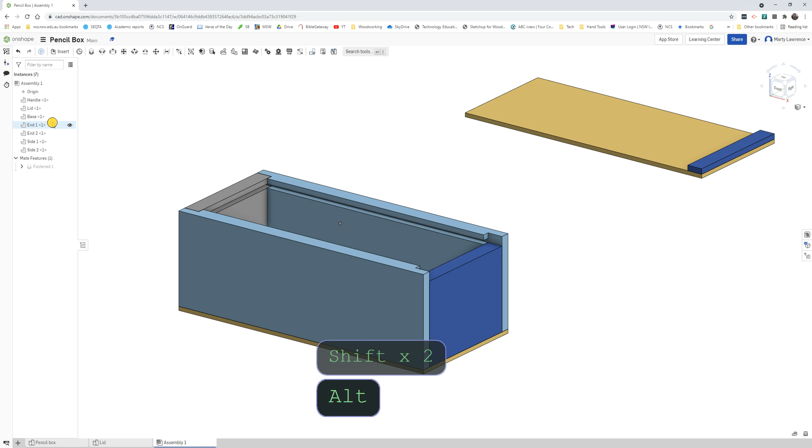Over here in our browser, we've got all our parts listed. We need to fix some of these in place. The handle and lid we're going to make slide in and out, so we're not going to fix those since they have to be able to slide. But we're going to fix the base.

Right click and go find fix, and it gets this icon next to it showing the part is fixed. Basically all the parts that make up the box we need to fix in place. So base, the two ends and the two sides are all fixed. The handle and lid shouldn't have that icon next to them. If you accidentally put it there, right click and do unfix.

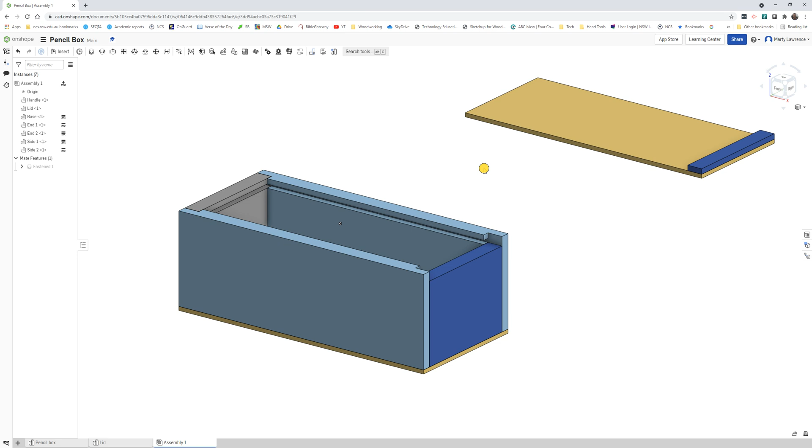This uses a different type of mate. It uses what's called a slider mate.

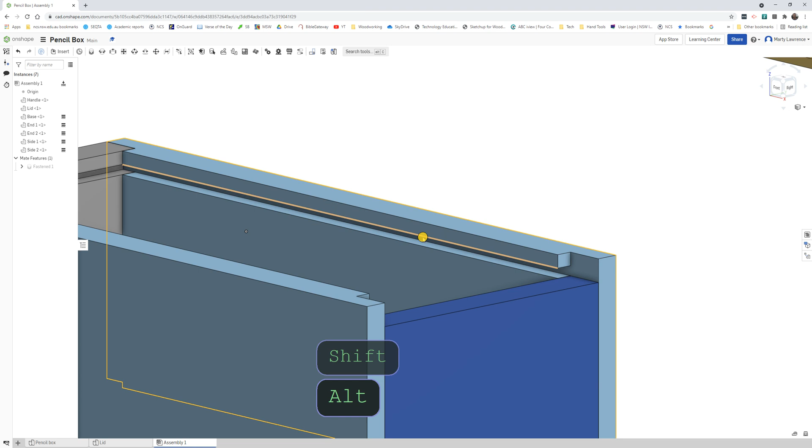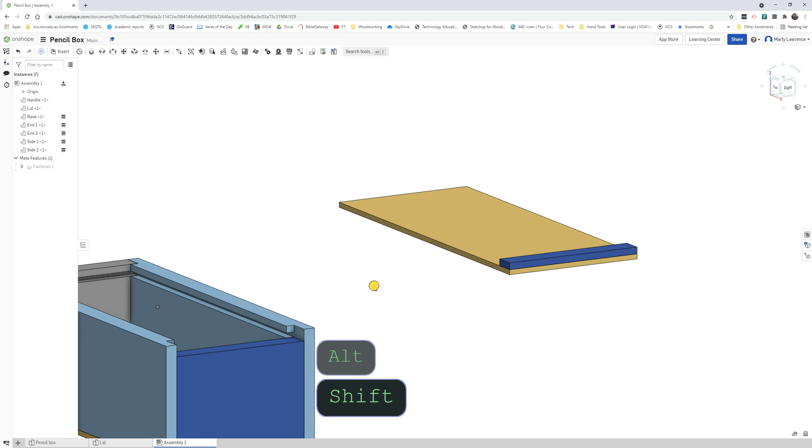Now we have to visualize and understand in your head how this lid slides in here. If you can imagine, I'm going to zoom right in here, look inside that groove, and we've got this edge in here - I'm hovering over it right now, hopefully you can see it. The inside bottom edge and the bottom edge here will be touching against that. So it's important that they'll be touching each other, and that's how it will slide.

So we're going to look in the toolbars for a thing called a slider mate. Firstly, we're going to zoom in so we can see that little edge inside that groove. Again, we need to make sure that icon is standing up, not laying flat, and it looks like it's kind of encircling the edge. Once the icon looks like it's in the right place, click.

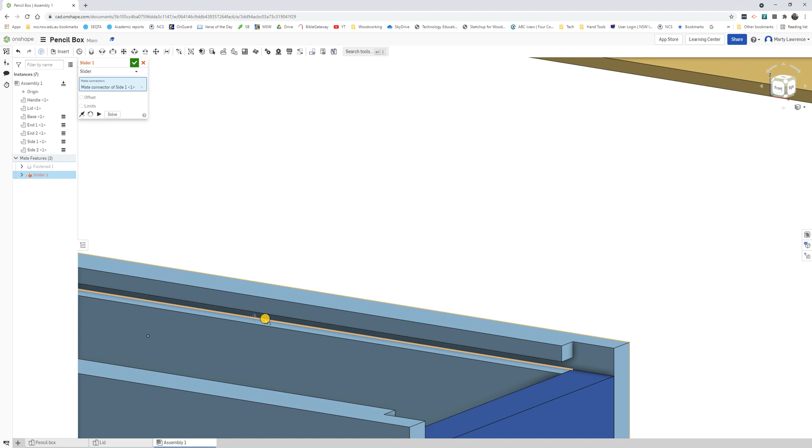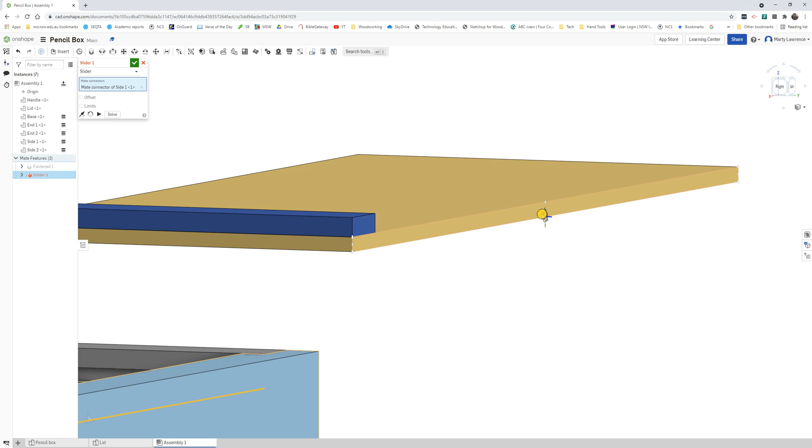Now we're going to zoom backwards, and I'm going to orbit around so I can see this edge of the lid, and the same thing here - make sure that little icon looks like it's encircling that edge. It shouldn't be sitting flat or anything. Don't click anything until it's sitting in the right place. Try moving your cursor in different places until it looks right, and click. Now don't be too concerned that it's left that thing in the air - that will put itself in place shortly.

I'm not going to try and explain why or how, but this works. Actually, I'm jumping ahead of myself. If you need to, you could try flipping and revolving, but it must look like it's sitting in place.

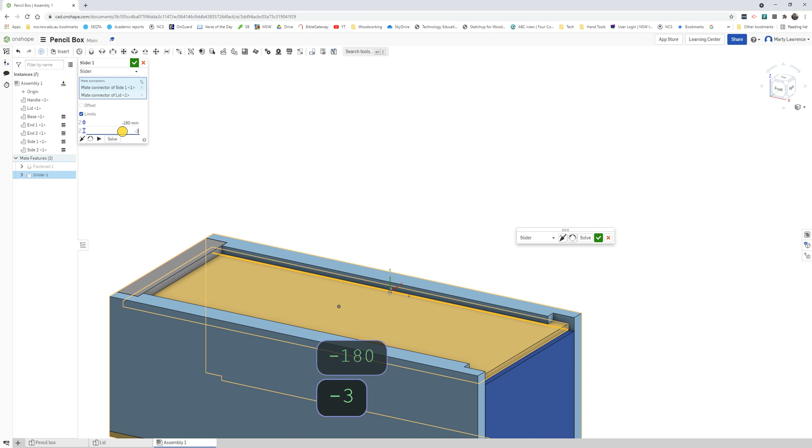Now we're not going to tick yet. We're going to go over here to this dialog and click the limits button. I'm not going to explain how, but these numbers work. In here where it's got no minimum, type in -180, and below it type in negative 3. Press enter. Now it should look like it's moved the lid in place.

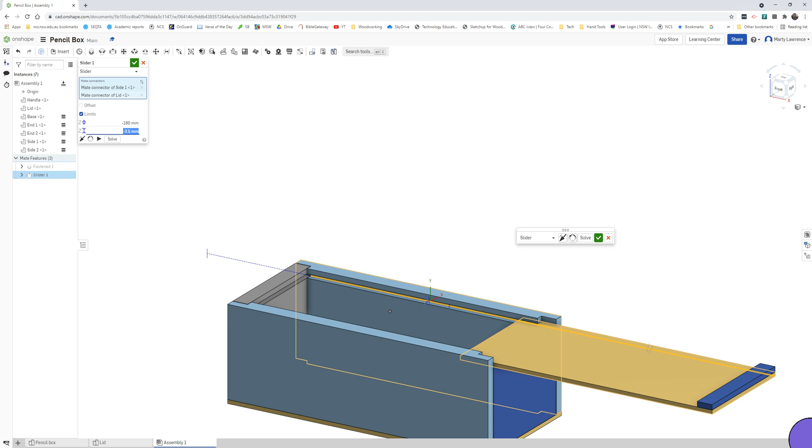One thing you can try is dragging. If we got those numbers correctly, it should drag and stop, drag out and stop, and not go any further. Notice that it's put the handle back in place now. If it didn't put the handle in place, try clicking solve, and it should do. There's a little play button here which can animate that movement.

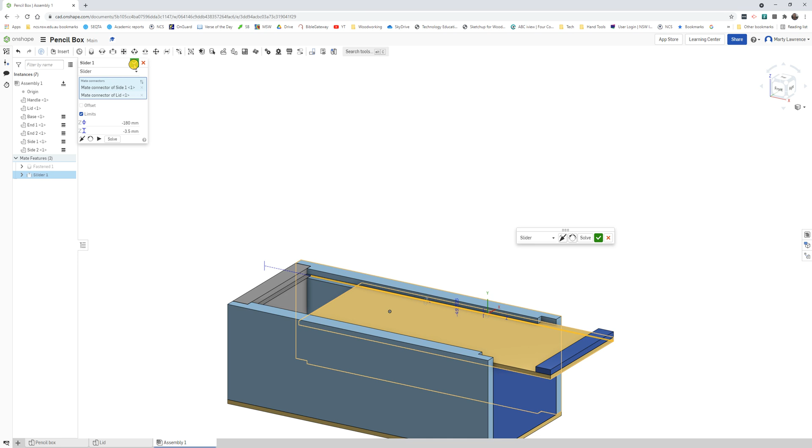Once we're good, we can tick. What you should be able to do now is drag your pencil box lid in and out. And that completes our pencil box.